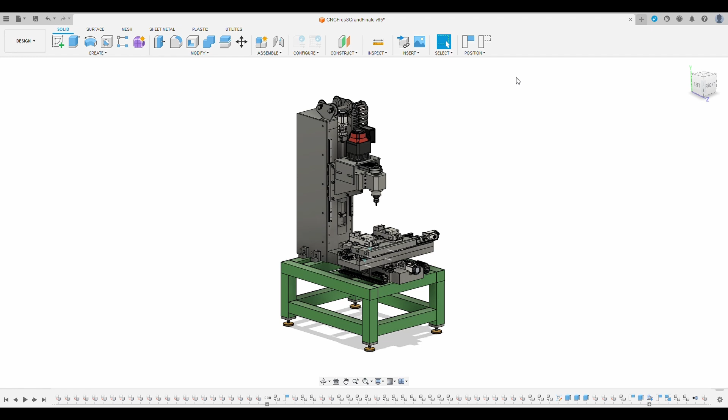This is the 3D model, and I thought I'd briefly show you the ideas behind it.

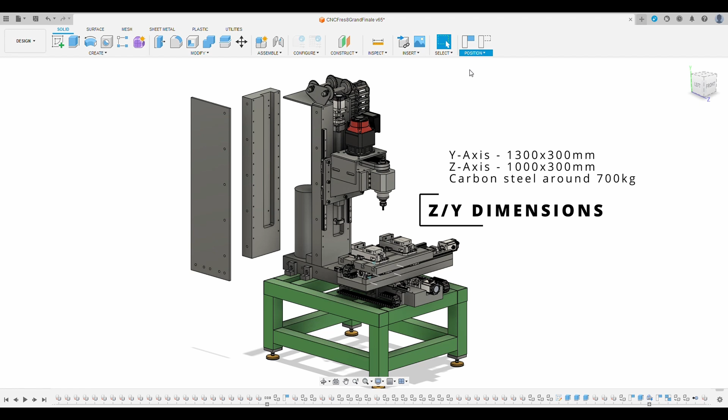It's a classical C-frame. The main axis is made of two quite big metal slabs, around 350 kilos each. So kind of heavy duty and very rigid. It's also made of carbon steel.

It's also got this weight counterbalance system, as you can see here. Very commonly used on this type of machine. The spindle assembly alone, with the motor, spindle nose and everything, is around 200 kilos, so I have to balance it somehow.

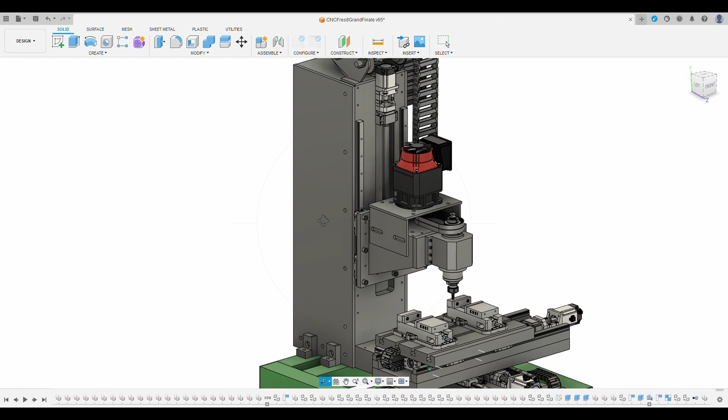Also got some iterations of an automatic tool changer that at a later stage I want to add. It's also the reason for the quite long Z travel here, 600 millimeters.

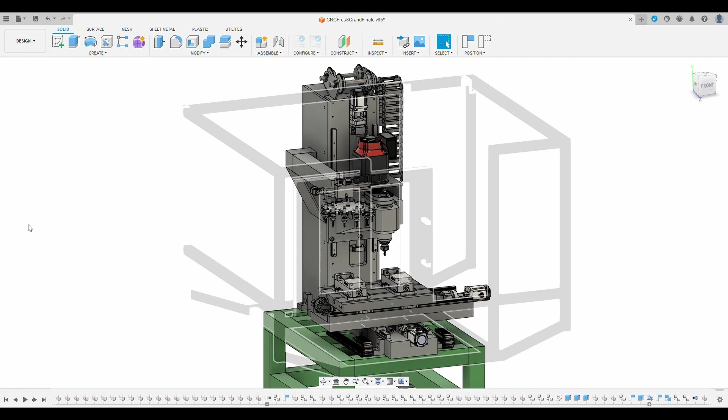Also made some iterations of the cabinet. Here you can see the frame and the plates as well, and an electrical cabinet on the left side here.

Mainly some inspiration from the Haas Mini Mill actually.

Also going to add a water tank here with some high pressure pumps for the cooling.